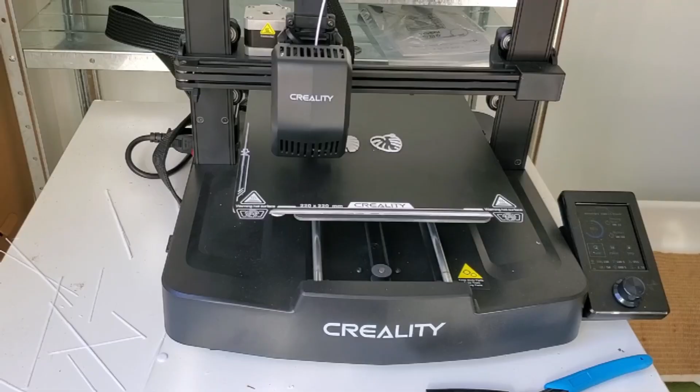Hi everyone, in this video I'm going to be showing you how to make keychains using SVG files on a 3D printer. We're going to be downloading SVG files from SVG repo, then we're going to change that file to an STL file in Tinkercad, and then once we have the STL file we'll change that to G code, which we'll then 3D print. Don't worry, I'm going to give you step-by-step instructions and show you the best way to do it.

As you know, I love making keychains. This is what I made this week. I'm making a corkboard now, and I'm going to be putting all my 3D keychains there, and I'll post all those links in the description. So let's get going.

So what is an SVG file? It's a vector file that you can download anywhere from the internet. There's some that's free, and other ones that are paid. Obviously we're going to be using free because you clicked on this video. The website that we're going to be using is SVG Repo, where you can find heaps of icons or files. Let's go there.

So we're going to go onto SVG Repo, and then we're going to click here to search for a vector. I'm going to search for a Monstera and enter. I like this file, so I'm going to click onto that and download the SVG vector, and that will then come into my downloads folder.

So now we have the SVG file. What we're going to do now is go to a website called Tinkercad. I'm going to type it here, and you're going to have to sign up on this website. Just make sure when you enter your date of birth, don't enter a year that's too young. I think they have to do a parent check if you're under 13, where they have to get another account for the parent to give permission to use it.

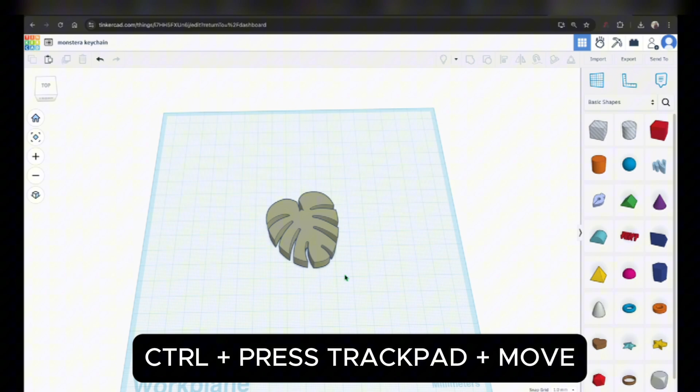Okay, so now that we've got it, the one control I wanted to tell you is if you click control and click on your mouse and hover, you can change the perspective from left to right, or you can click one of these top, right, and other views.

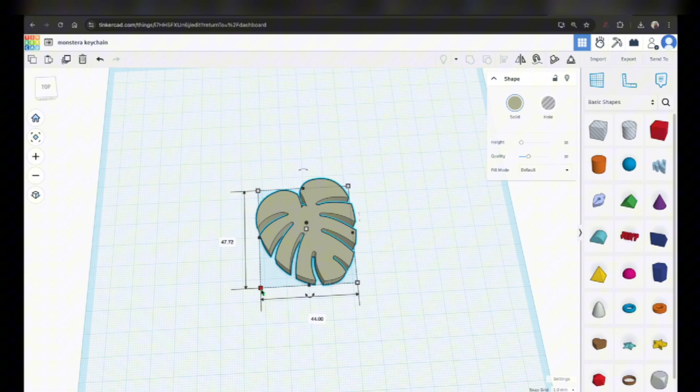And if you click on the item and press F, it zooms into that item. What I'm then going to do is hold shift and click one of the sides on the left, and then release shift, and this shows you measurements.

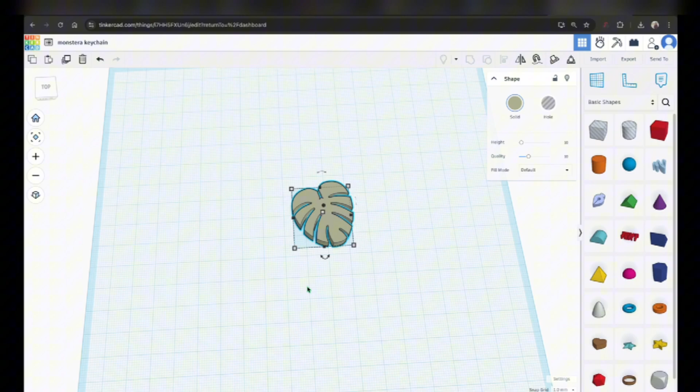I'm going to click onto the left side and set the measurement to 30. I find that while making keychains, 30 millimeters is a really sweet spot. You can make it as big as you want, but when you're putting it in your pocket, it just gets too big or too long. If I click here again, you'll see the bottom didn't change to 30 — that's because it maintains its aspect ratio, which is what we wanted.

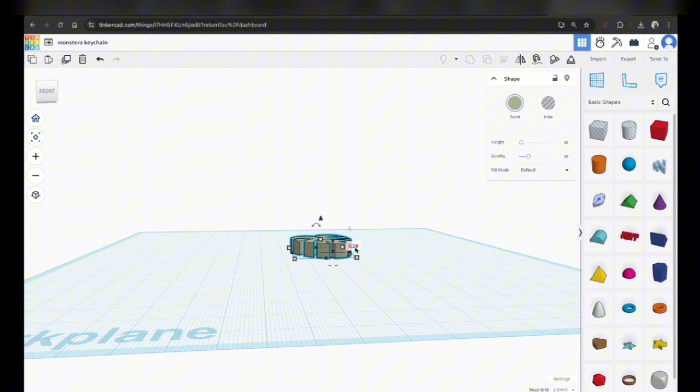Now we'll change the angle by clicking control and clicking on the mouse. If you can see this square right in the middle, this shows you the height of your item. I like it to be at 2 millimeters. So if I go back to the top and check all the sides, you can see it's all 2 millimeters now — this is the top side, this is the right side. So we're almost finished making the keychain.

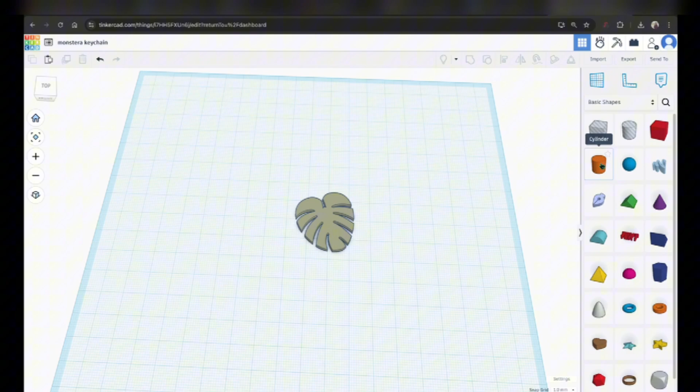We just have to make a keyhole now. So I'm going to take 2 cylinders, one solid and the other one with a hole. What I'm going to do is make the big solid one about 6 millimeters. I'm going to hold shift, click one of the sides, click on the measurement, and type 6, then enter.

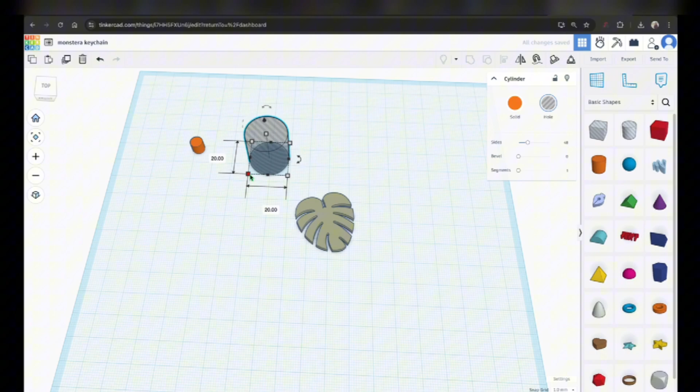And then the other one I'll do the same. I'll click onto shift, click one of the sides and type 3, so we want the hole to be 3 millimeters big. I'll take this one close to the other hole and then press F so that it zooms out just a little bit more.

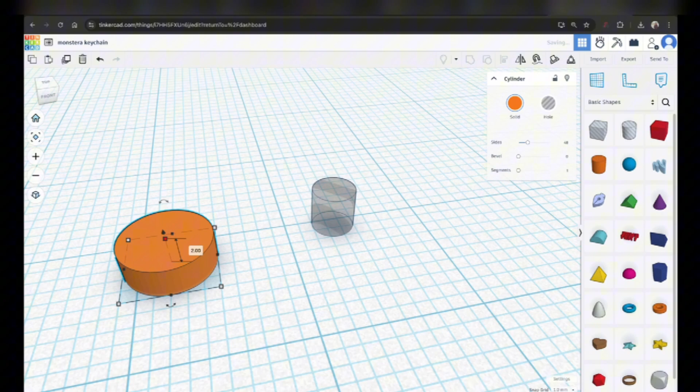Change the angle just about here. So what I'm going to do is change the height of this one to 2 so that it can match the keyring that we have. And then I'll change this height to 6. Honestly, it doesn't matter, you can go as high or low.

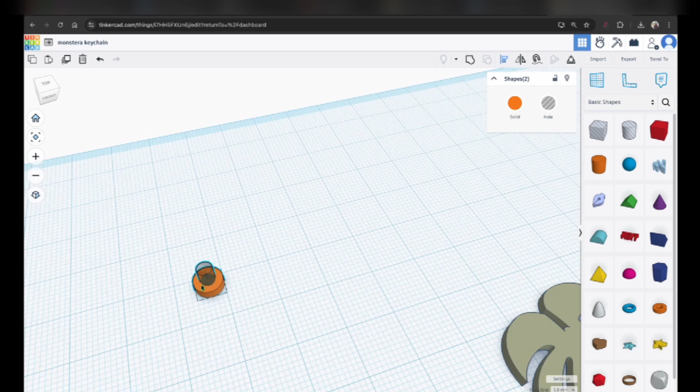And then I'll come on the top view somewhere about here. And then I'll click onto both items, press L, and then a dot in the middle and a dot in the middle on the left. What this means is it properly aligns, and the 3 millimeter circle fits very nicely in the 6 millimeter circle. I'm not going to group this one at the moment.

What I'm going to do is, I have both selected, then I'm going to take it to my Monstera leaf and I'll go somewhere about here.

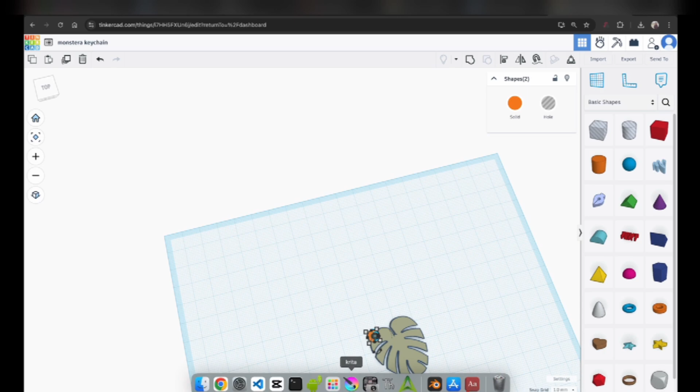Sometimes when you zoom in, it depends where your mouse is. So if you zoom here, it will show you here. So what I find is if you zoom a little bit here, then here, you'll land almost perfectly. So yeah, that might help you as well.

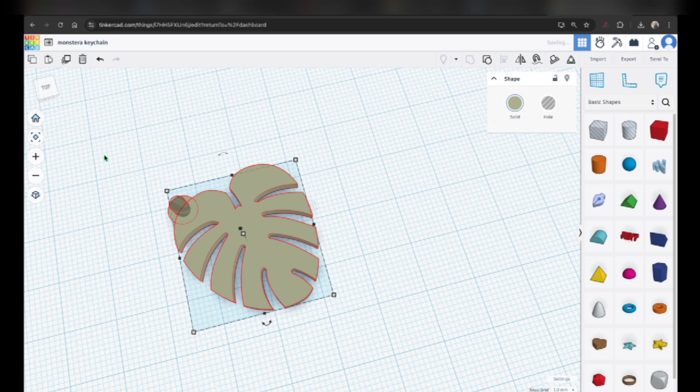So what I'm going to do is then click outside, click everything, then press Command G. I think it's Control G in Windows. I'm not sure, I've never used Tinkercad on Windows.

And there you go, you have the keychain holder now. This is all we wanted. You can change the colors here to make it nicer, but that would not change the functionality of anything. I'm then going to export this file to an STL file.

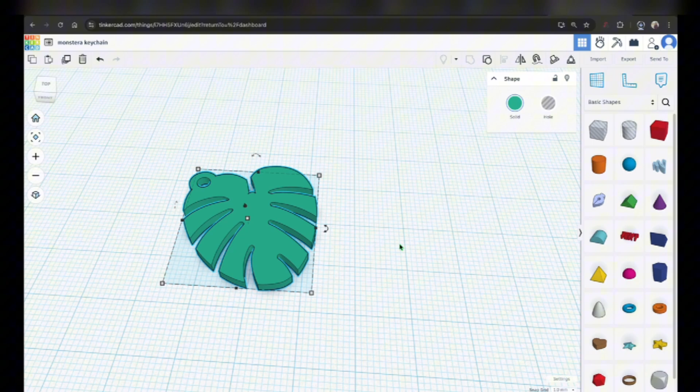And then if I go to my downloads folder, you can see that I've got an STL file. I can click on it by pressing the space bar, and then just clicking on the mouse and hovering around to see what's happening, to see what it looks like from all sides.

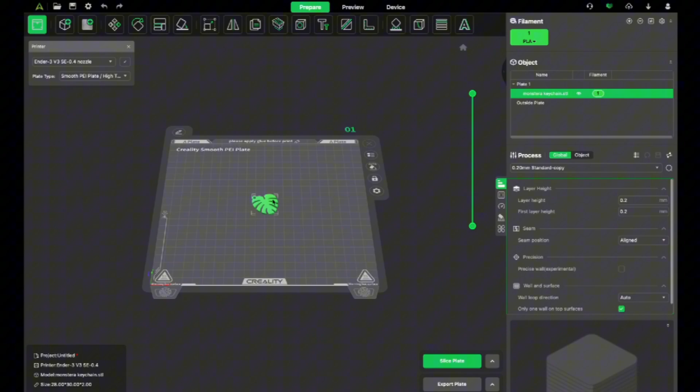Once that's done, what I'm going to do is open my Creality Print, make sure there's nothing there, and then go back to my Finder, hold the file and drag it to Creality Print. I'm not going to change any measurements here because I already have the measurement set.

I'm then going to slice using a slice plate, and then export plate in my download folder to Monstera leaf keychain. Press done. And now if you already have a 3D printer, you know the process to transfer it onto a memory card, and yeah, go for it.

I'm going to go and set up my 3D printer and show you the time lapse of the Monstera leaf.

We're done with our Monstera keychain. I usually just grab one of the sides and hold it up, and because these ones have so many sides, I'll just slowly pull all the sides and yep, one will pop off.

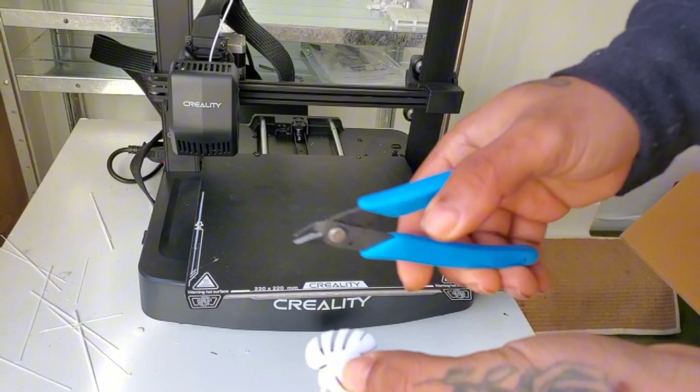And if you're using it as a keychain, it will just rub off on its own. I recommend using gloves if you're allergic, but yeah, there you go, a nice keychain. I'll just get the key in a second, but as you can see, the hole's big enough.

It's because the thing is wide, it's having a hard time focusing. But yeah, what do you guys think?

So there you have it, a 3D printed keychain. I mean, it's 3D, 2D printed, but yeah, still using a 3D printer. And yeah, you can make this as well.

I'm going to, in a second, put that on one of the keychains. So there you have it, a 3D printed keychain. And I just put that onto a keychain on my bike key. And yeah, while you weren't looking, I also made an outer layer of Monstera, which you will learn if you watch my future videos. Good luck with your key making process.